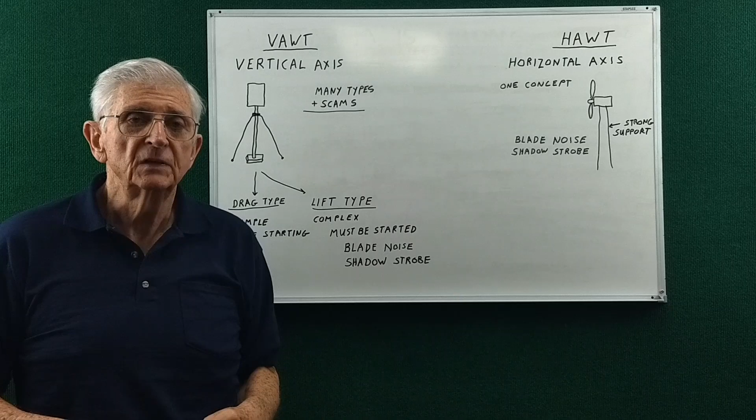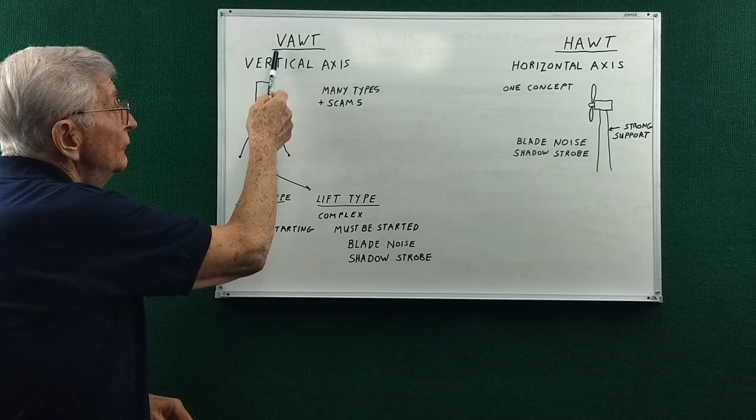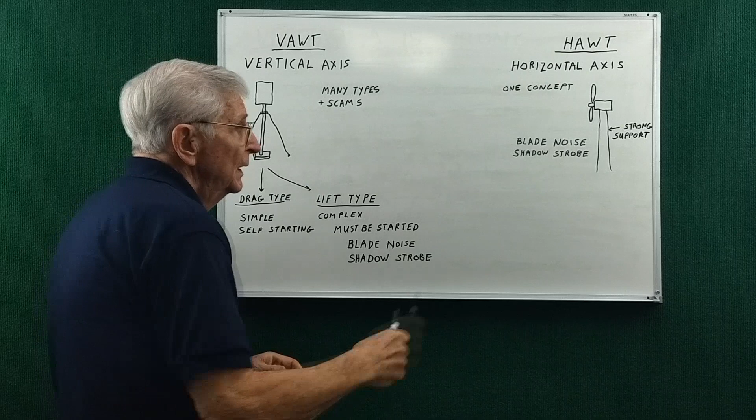Wind turbines basically come in two flavors or styles. There's the vertical axis wind turbine and the horizontal axis wind turbine. The large industrial wind turbines are generally of the horizontal style, and there's basically one concept of design, and they're fairly well understood by the average person.

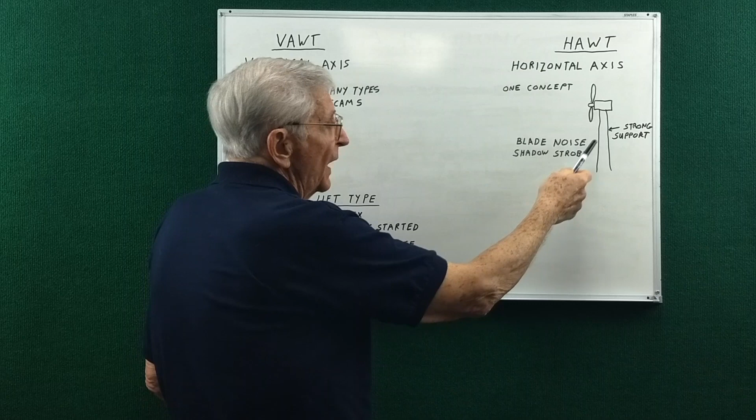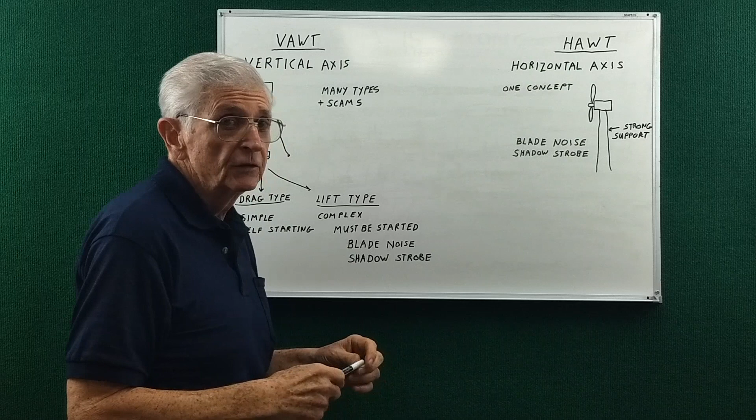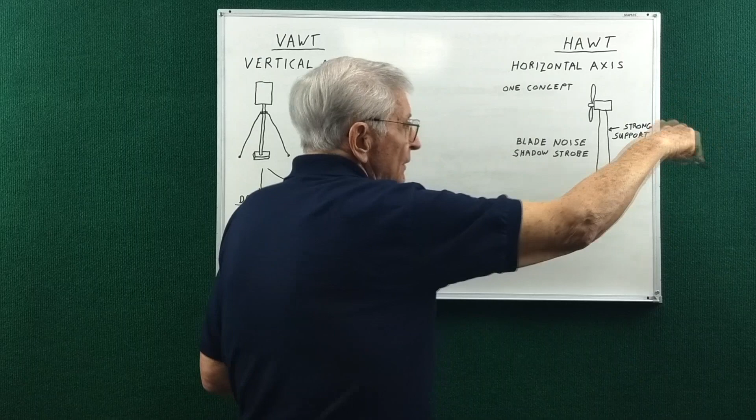One of the hard things about it is all the heavy and complex machinery is up in the air, which then requires a strong support. And two of the main considerations for use in a home setting is blade noise and shadow strobe. When the sun gets low in the sky, the shadow of the blades spinning across your windows is very annoying. And whether it's you or your neighbor, this can be a big problem, which sometimes is not thought about too much ahead of time.

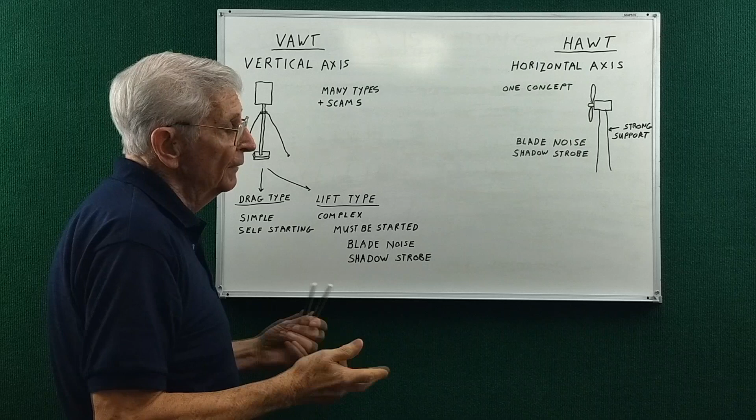Another problem is there has to be some system to keep that blade turned facing the wind, and that adds to the complexity. Now, when we talk about vertical axis turbines...

There's many different types, and they're basically divided into drag type and lift type. The lift type has blades, and the drag type may or may not, depending on how it's built. Lift types are generally more complex than the drag type, and they must be started, whereas the drag type is self-starting.

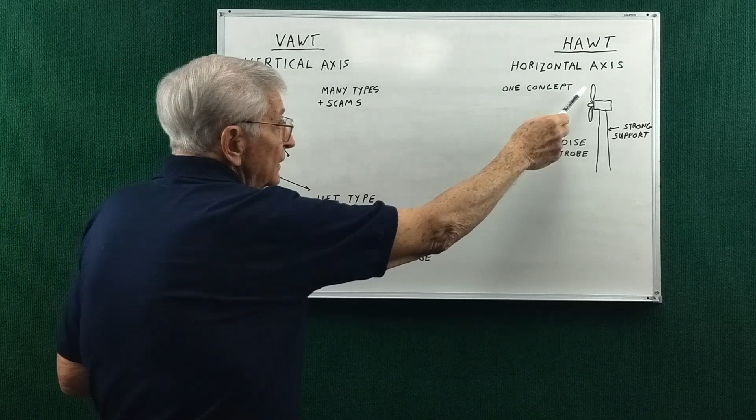Sometimes a drag type is employed within a lift type just to get it started. The lift type also has some blade noise, not as bad as the horizontal axis, because the tips of the blades are not going all that much faster than the wind speed. Here, the tip of the blade can be going up to 10 times the speed of the wind.

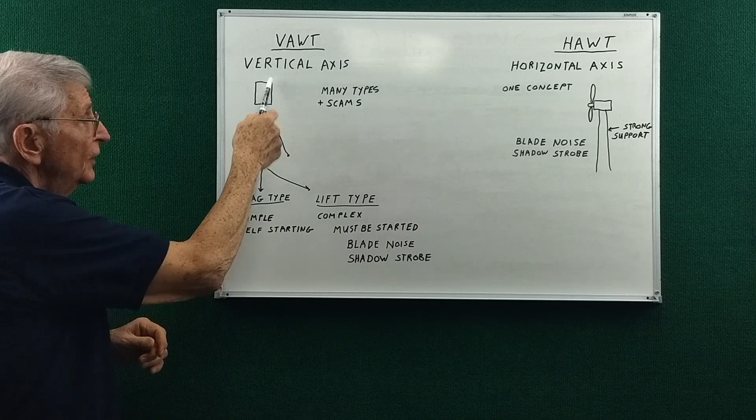And these can also have shadow strobe because they're generally individual vertical blades. A drag type can be built in a way that the shadow doesn't change as it turns.

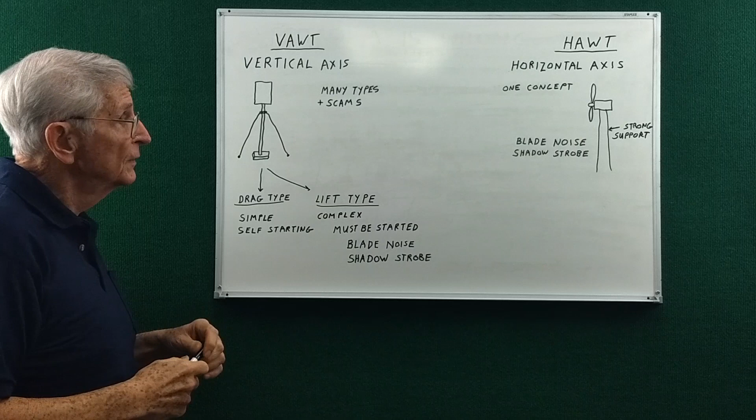Now, I've included links to a lot more information about both vertical and horizontal axis wind turbines, and videos showing some examples of these, and several videos showing scams, because there are so many different designs of the vertical axis. People don't readily understand them and can't see when something is obviously a scam. So look at the videos about scams so you don't get suckered into that.

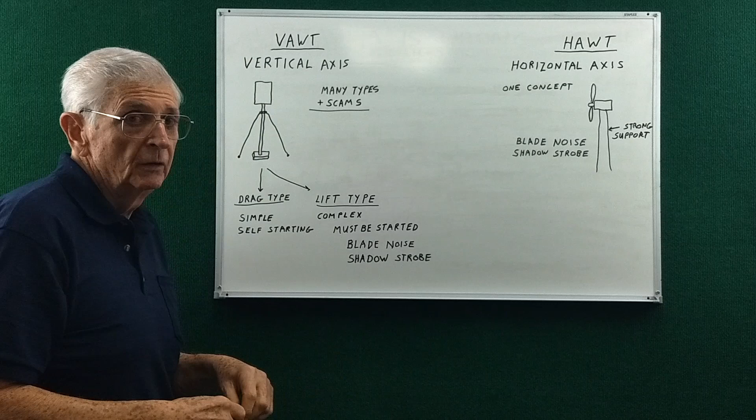There's also some scams on low power horizontal axis wind turbines, but generally the situation is not nearly as bad as with the vertical axis.

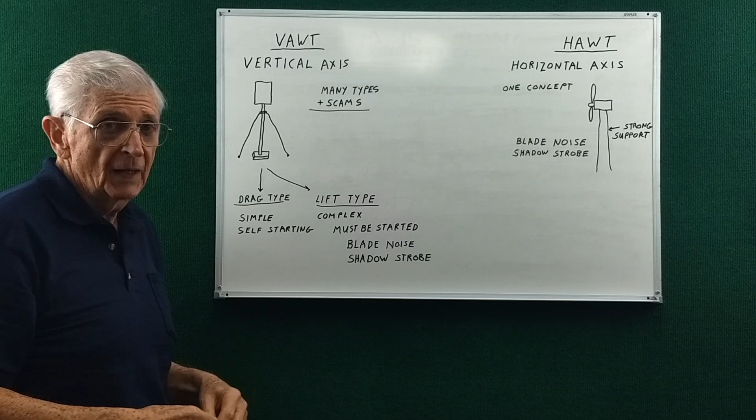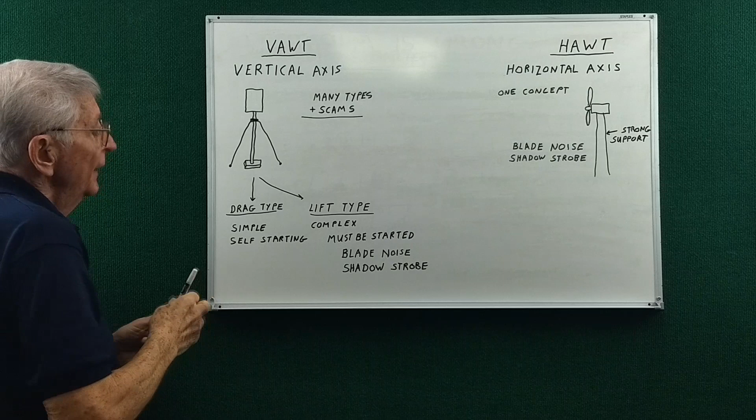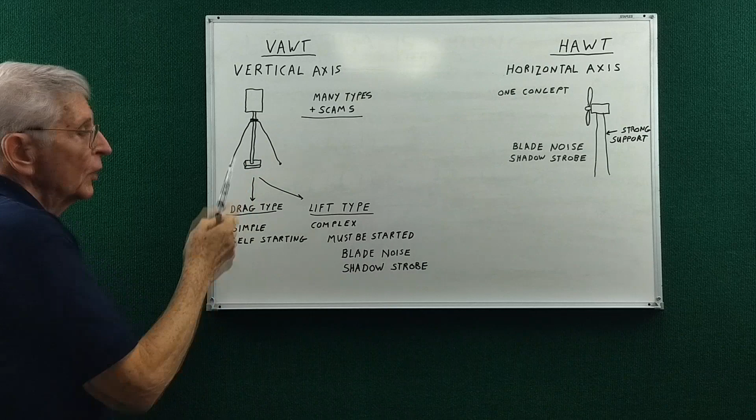Because the heavy machinery for a generator and so forth can be located at the bottom of the vertical axis wind turbine, a very flimsy support can be used. And in fact, guy wires can be employed. If you make this a bearing so that the vertical support can rotate, it's possible to use guy wires. Because these type of windmills are much lighter than those, the support can really be quite flimsy.

Now let's talk about a drag type vertical axis wind turbine, which is also known as a Savonius type. For the moment, I've simplified things into an arrangement similar to a drag cup anemometer for measuring wind velocity.

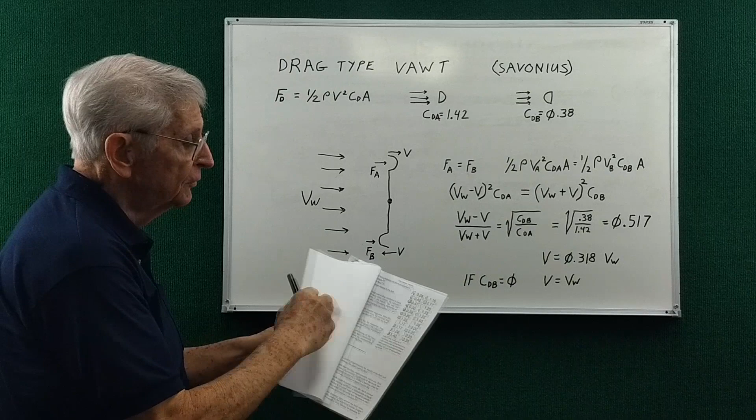Here we have two cups on a pivot point, and I have a link below to an article on Wikipedia called Drag Coefficient, where it shows the drag coefficients for various shapes of things that are in an air path. So there's a force equation, called the drag equation, where the force on an object is 1/2 of rho, which is the density of the fluid, times the velocity squared, times the coefficient of drag, times the area. It's the cross-sectional area of the thing that's being blown on.

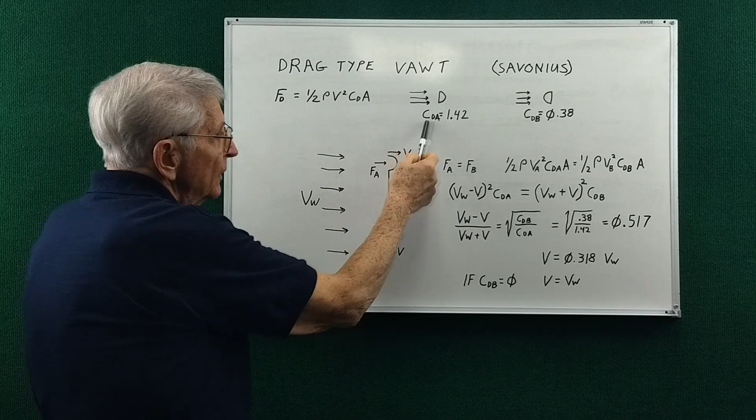So for a cup shape with the wind blowing behind it like this, the drag coefficient is 1.42, and when the wind's blowing on the other side, the drag coefficient is 0.38.

So if we have an arrangement here where we're not accelerating, that means that force A is equal to force B. So if we do that, we can see that everything drops out except these terms right here.

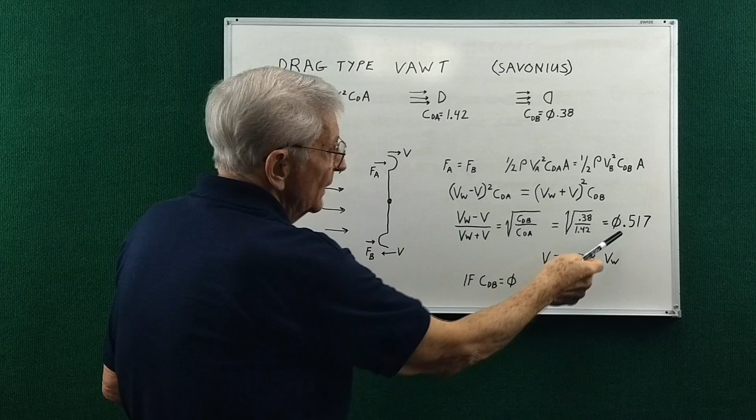And for these coefficients right here, we end up with this term equal to 0.517. If we cross multiply and add and subtract, we end up where the velocity of the cup is 31.8% the speed of the wind.

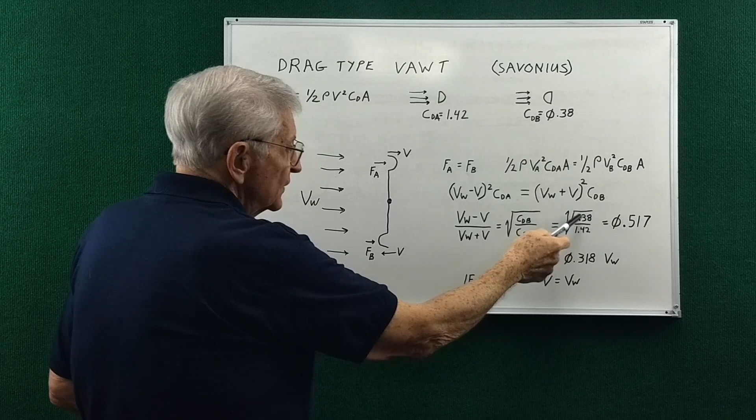Now, I think you can see if there was some way to reduce the drag of this cup to 0, that 0.38 would be 0. When you cross multiply, this term goes away, and we end up with VW minus V equals 0. So in that case, the velocity of the cup is equal to the velocity of the wind.

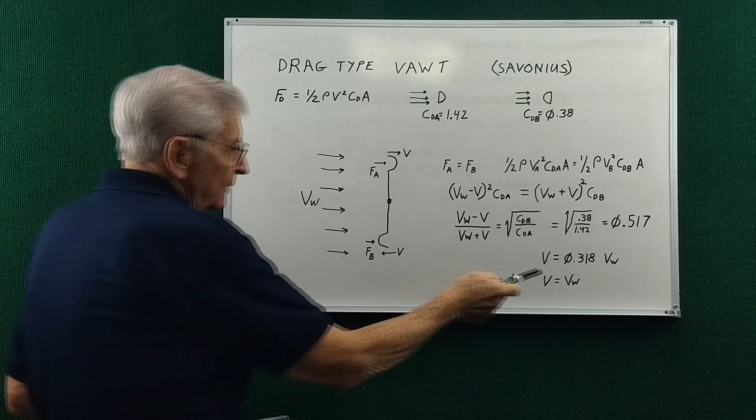Now in either case, to extract any torque out of the shaft, it's going to slow the cups down because it's going to require more force to produce the torque that you're taking away. But you're going to have more efficiency when you're starting at almost 3 times the speed.

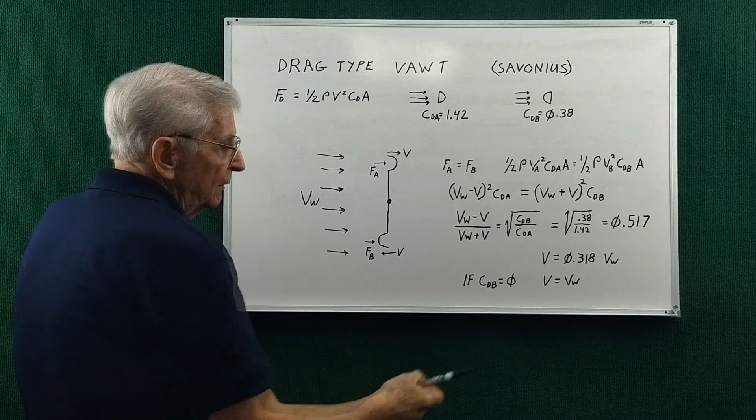But of course, to achieve that, there has to be a way to reduce that cup drag to 0 in that direction, which you can't totally do, but we can approximate it. And I'll show you how to go about that here shortly.

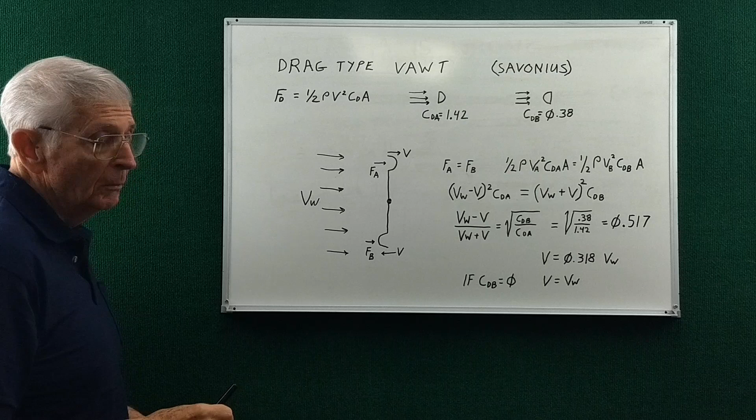Now, let's think of these cups mounted on a drum, maybe even have more cups. With that arrangement, it doesn't matter what direction the wind is coming from. It's going to catch in these cups here. And if we could make these cups go away on the return side, then we can have that condition there.

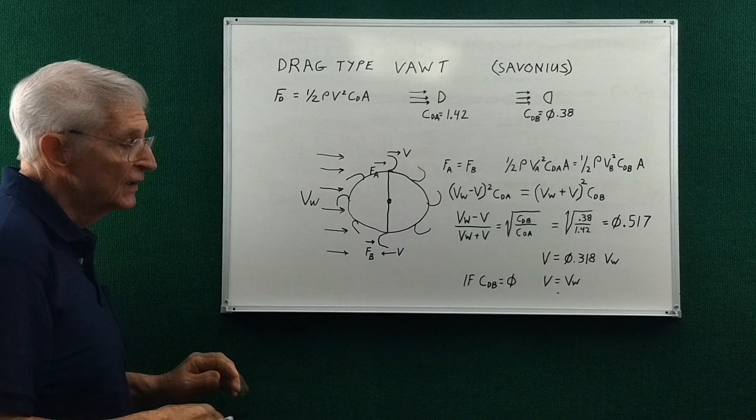So I've built a little demonstrator that's a proof of concept to show this in action. So we'll look at that next.

Well, I hope you won't laugh at my setup here. But basically, we have a fan to make some wind. And here, this is on a shaft. It's free to rotate. It's basically a coffee can with strips of paper towel. Each paper towel is taped to the can here, and then the ends are taped here and at the bottom.

So if the wind were blowing in this direction, it would catch in there. But if the wind's in the opposite direction, it should tend to collapse and therefore reduce the coefficient of drag.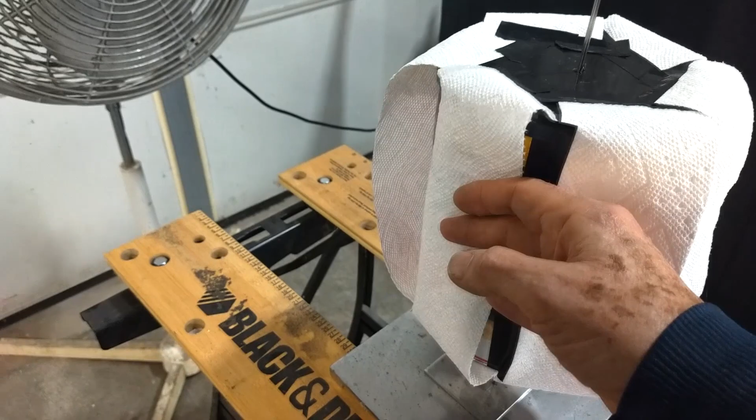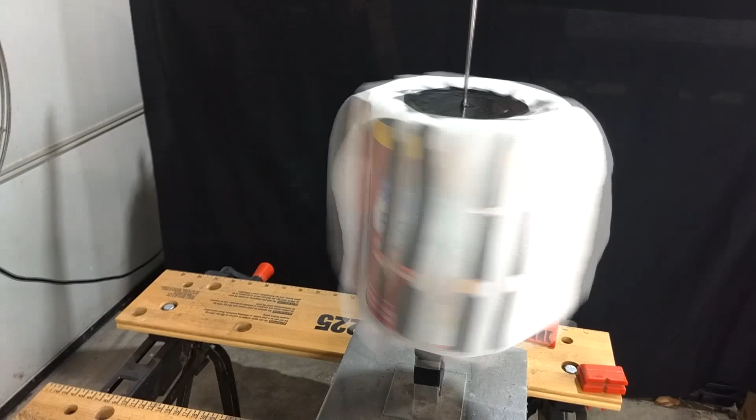As the wind blows, let's turn on the wind here. There, and as you can see, it's self-starting. I put the black background there to help show that over here the profile shows the towels somewhat collapsed, but on this side you can see them bulging out. So the bulging out should increase the drag coefficient over here, and by collapsing on this side, that should reduce the drag.

Now that's a rather low setting of the fan. There, I think you can see how flat the profile is over here, and it's quite bulged out over there. So that indicates we're also getting some Coanda effect, where the air is coming around behind the unit. And we're also getting some augmentation where the air is hitting this side, it's then forced to go around the sides.

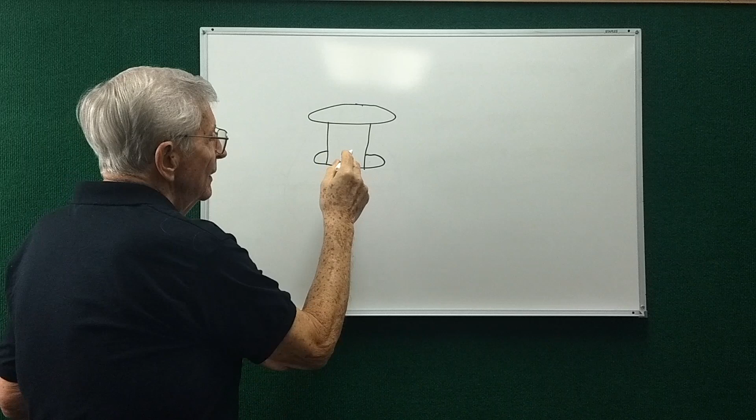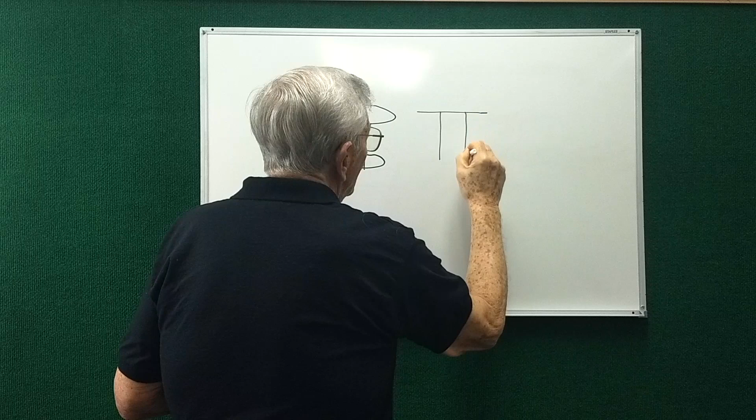Okay, it's time to make our wings or sails or cups, whatever we're going to call these fabric pieces. If we have a round plate and a cylinder, and then another round plate, we want the sail to be collapsed totally when it's coming around into the wind. So if we draw a cross section of that, we want to anchor our sail here.

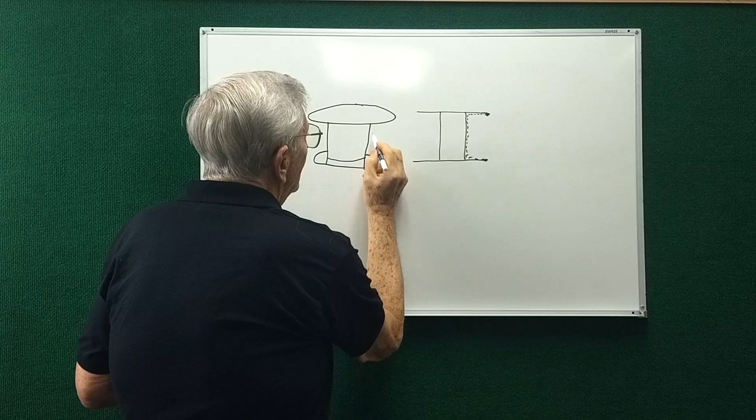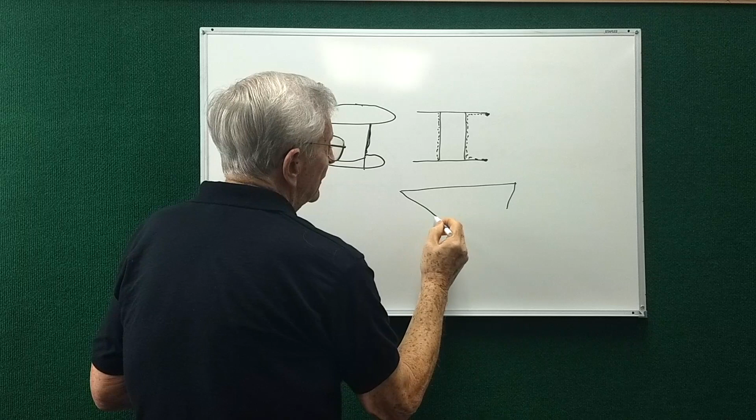It has to be long enough when it's collapsed to go around there, and it would be anchored at these points. And the other edge of the sail, we want to be this length, the length between the plates on the end. So that means it's basically a trapezoid shape. This edge is going from there to there, and this edge is going from here to here.

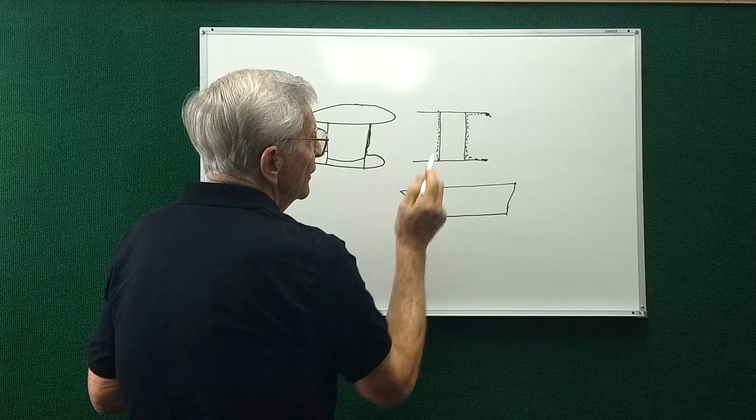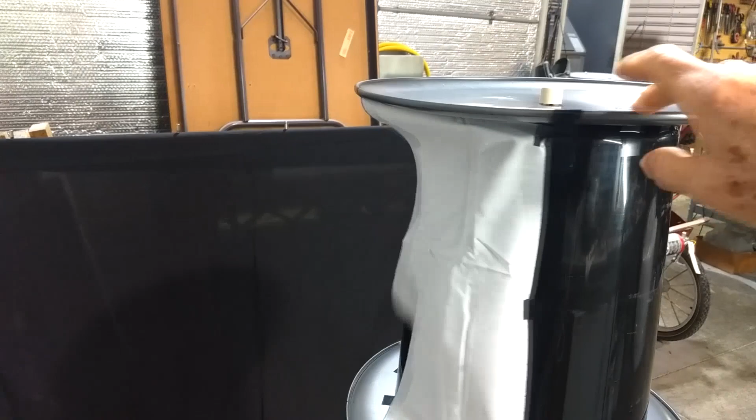So as it comes around from the left, it is collapsed and offering minimal wind resistance. And then it opens up and catches the wind. Let's go a little faster.

So I'll cut out another sail and add it and see how that works. Okay, I've added a second sail, and we'll turn the fan on low speed again.

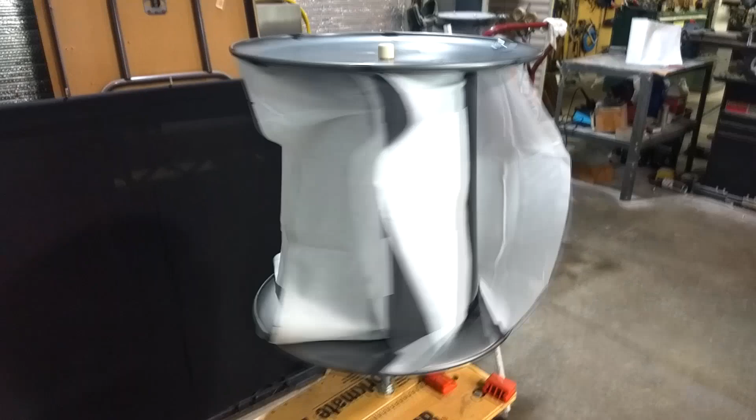I think you can see quite well how they're collapsed as they come around on the left side and then open up when they catch the breeze on the right-hand side. So let's take the speed up a notch.

Seems to be working pretty good. Let's go for broke and put the fan on high speed.

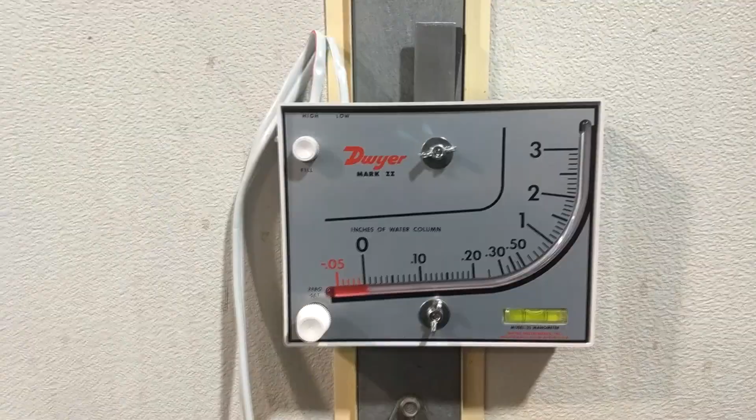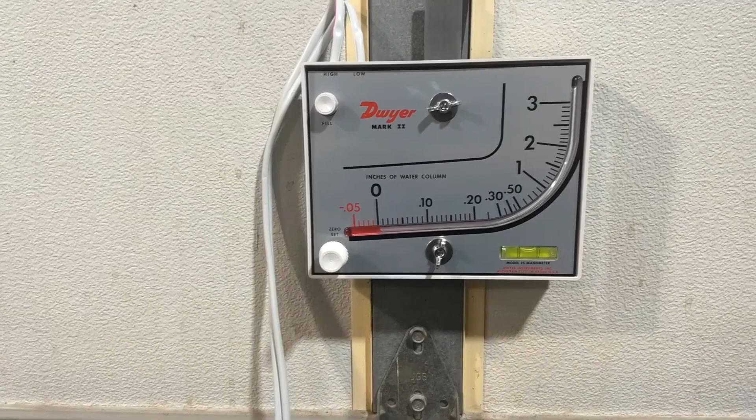Okay, I think the next step is to try and get some idea what the velocity of the air is from this fan that I'm using. This device is a pitot tube. It's used for measuring the velocity of air. Right now it's through tubing connected to a differential pressure manometer. The first division here is 0.1 inches of water pressure, and that corresponds to about 14 miles per hour of air velocity.

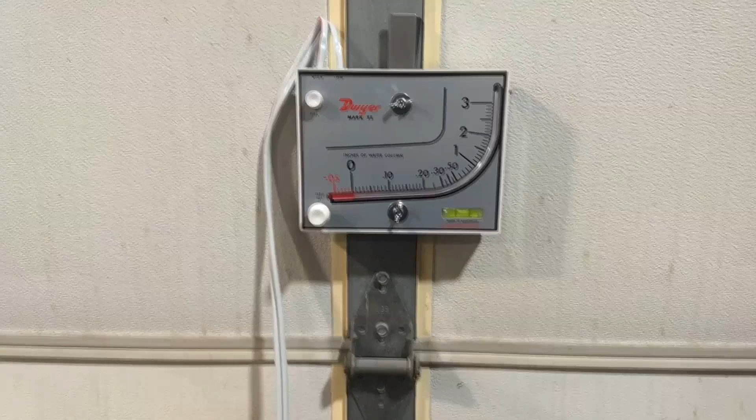So let's run our fan and see what our air velocity really is. I'll set the fan on high speed. It's hard to show what I'm doing here, but I'm going out to the edge of the airstream and then coming in, and I hope you can see the pressure going up. And we reach just a hair over the 0.1 inches of water. Now as I come into the center of the fan,

I'm moving towards the camera. At the center of the fan, I'm showing almost no airflow at all. And then as I continue on across the fan, it's hard to really show what's going on here, but we come back up to a little over 0.1 inches of water column. So this is a very poor distribution of airflow from a fan like this.